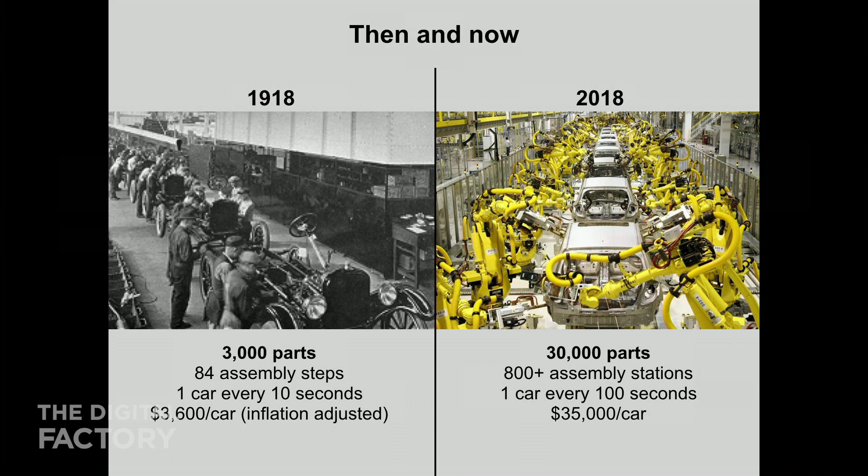So perhaps why we're all here is because we see the opportunity to become much more efficient, flexible, versatile, on demand, at the point of use, whatever words you use in your specific context.

If I may sit on the idea of the automobile as a manufactured artifact, an automobile and many other products are so complex and so important that there exist businesses for the purposes of taking them apart and analyzing them. This is a successful business in the Detroit area called Munro & Associates, well known in what they do, but their business is they do competitive teardown.

They buy one or a few of every car and they take them apart and they do the reverse analysis of how they were manufactured and what the costs are.

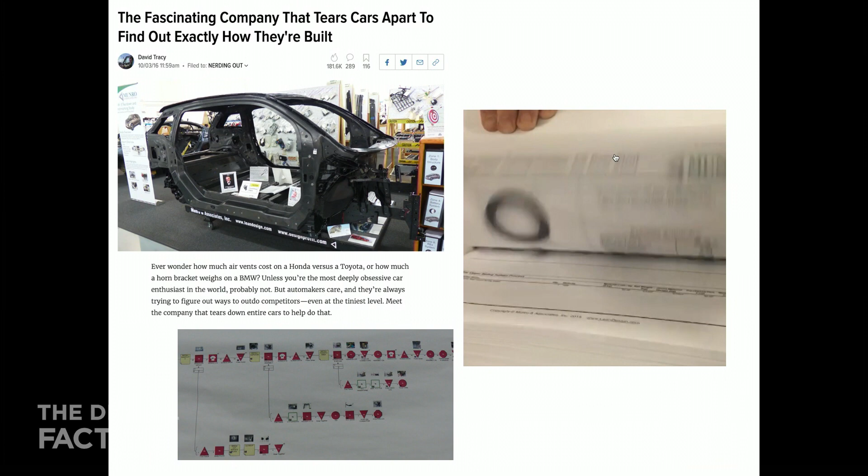Just think of the many levels of complexity that are created by having to use today's manufacturing techniques, which are so awesome in their own right, but so limited now that we can see the digital opportunity.

And of course, it's not just the resources required to manufacture the part and realize that capacity at scale, but it's the design and engineering and iteration process for the part and for the tool.

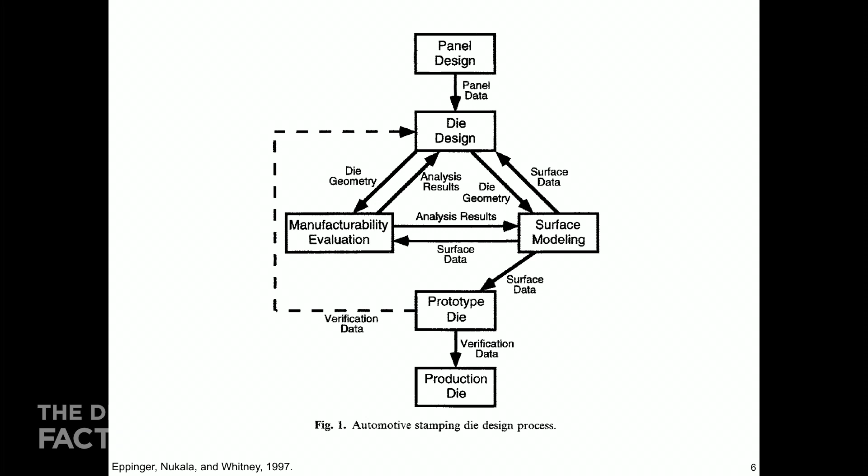I don't need to explain to you that if you're making a tool to make a part, say a sheet metal part, the tooling, design, and proofing requires iteration. So much opportunity for efficiency improvement.

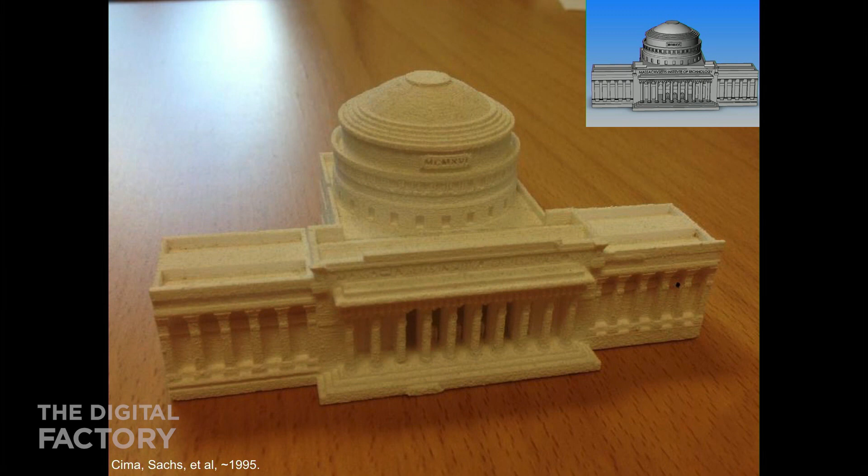And now we come to the idea of 3D printing, aka additive manufacturing, as an enabler of transformation. Of course, many of today's 3D printing technologies, in terms of the basic process, the basic idea, have been around for a long time. They were not invented yesterday.

I like being from MIT to show a picture of a 3D printed model of MIT's main building from nearly 25 years ago. My colleagues, Ely Sachs and their teams, were among the pioneers who had ideas to build objects digitally in 3D using the processes that are just coming to fruition today.

You can look at the additive manufacturing 3D printing industry in many ways, and you can say that it's about $10 billion, as reported by the Wohlers report recently, in materials and services and machines. But moreover, what's important is an industry with structure is emerging.

We have great interaction and collaboration among the software companies, the materials companies, the printer manufacturers, and the establishment of production capability, whether it is in-house in companies that want to vertically integrate or grow the capability in-house, or via service bureaus, whether you interact with them directly or virtually.

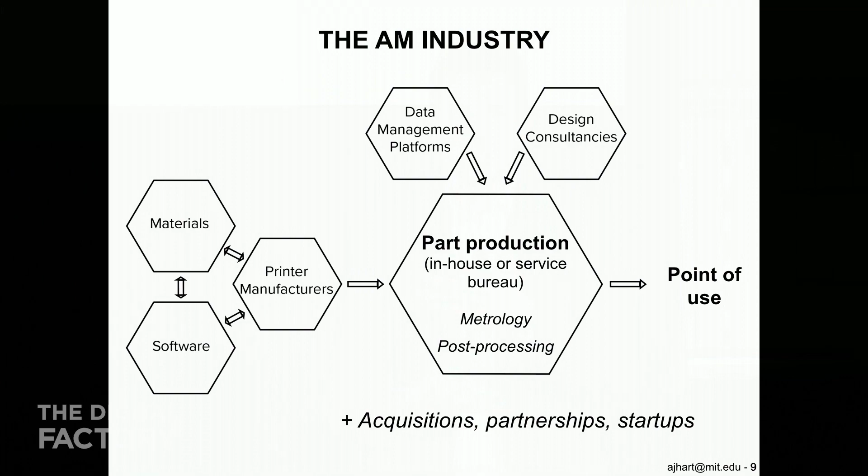We'll only see continued growth in all of these areas and interesting collaboration, partnership, and competition. That's the nature of that free market that's going to continue to grow the industry at an appreciable rate for the foreseeable future.

But moreover, I think it's not only important to say how much money the industry is generating every year, but what is the lens through which we should view the impact of additive manufacturing. In our courses at MIT and with industry, we've adopted the idea of viewing additive through the lens of the product life cycle. Every part that's designed, every product that is sold, arguably has a life cycle from the day of the first concept, the first idea, to the end of its life, when the last one on the road is serviced and used.

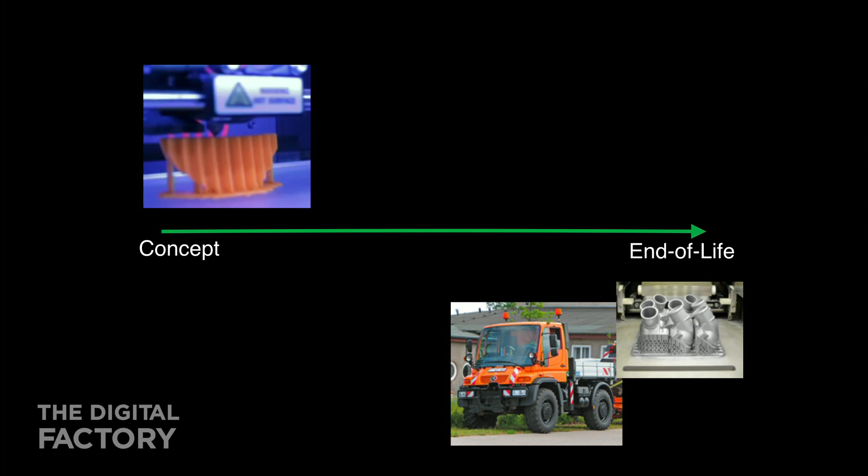But what's really exciting to all of us is the production applications. We cannot yet argue that additive manufacturing is a true mass production technique, at least not writ large, but there are more and more compelling applications where functional high-value parts are being produced using 3D printing at scale. This reflects, in my opinion, a far greater investment in technology adoption and integration than the measure of printers, materials, and services sold on a yearly basis.

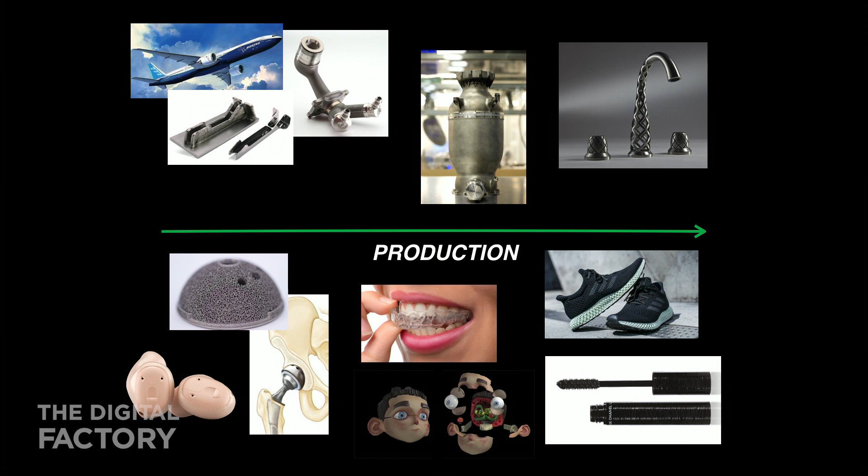So you have more and more valuable metal parts, from jet engine parts to components of rocket engines to even high-end home goods—you can buy an expensive faucet where the water goes up the spiral lattice. More and more medical products, metallic implants, where the real special deal is that the lattice structure on the surface of the implant improves patient outcomes and integration. That's the case of the hip implant, but it applies to many others.

Dental products, we heard about those earlier today. Even Chanel—you can go to a cosmetic store and buy a Chanel mascara with a 3D printed plastic brush designed to help distribute the mascara better on the eyelashes. So we're realizing the integration of these technologies in a true production context, and we're only at the early stages.

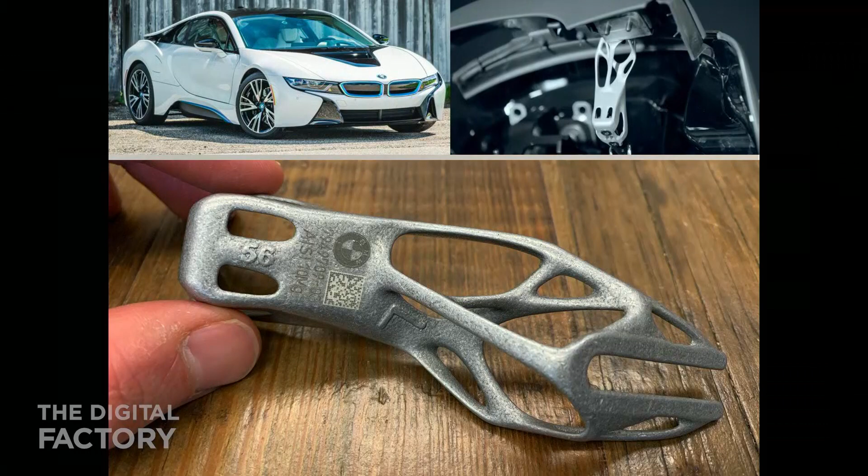One of my favorite examples, which maybe you've seen before, is this part from BMW. I have no affiliation with BMW, but I really think this is a beautiful example because it speaks, number one, to the fact that we're just scratching the surface of 3D printing's applications in the automotive industry. The automotive industry is vast, has huge scale demands and also very tight cost demands. So I think automotive will bring 3D printing to the mainstream like no other industry, in my opinion, but also that it's a story of design for 3D printing, achieving a very unique, complex shape, and also manufacturability.

If you study it a little bit or talk to them, you find it's maybe, you could say, a silly little part. I don't mean that negatively, but it's just a little roof bracket to open up the roof of a high-end roadster. It's not an engine part or a chassis part.

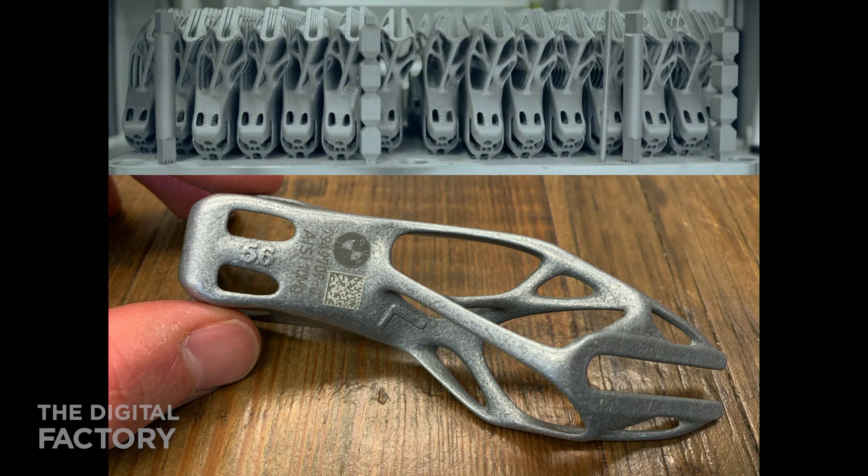But nevertheless, it has a serial number, so it is a real production part. And if you look at how it's manufactured, it's designed with manufacturing in mind. Because of the process they used, which has requirements for support structures and issues with thermal stress, they had to design it so it could be manufactured post-processing free. They make 300 or so on a build plate and snap them off. So it's a beautiful example of not just computationally guided design to make this beautiful shape, but also the incorporation of manufacturing constraints—this full spectrum knowledge necessary to realize a useful application.

But saying that you can make an exotic geometry by 3D printing and make a production case for tens of thousands of parts is only thinking of one of the vectors for value creation.

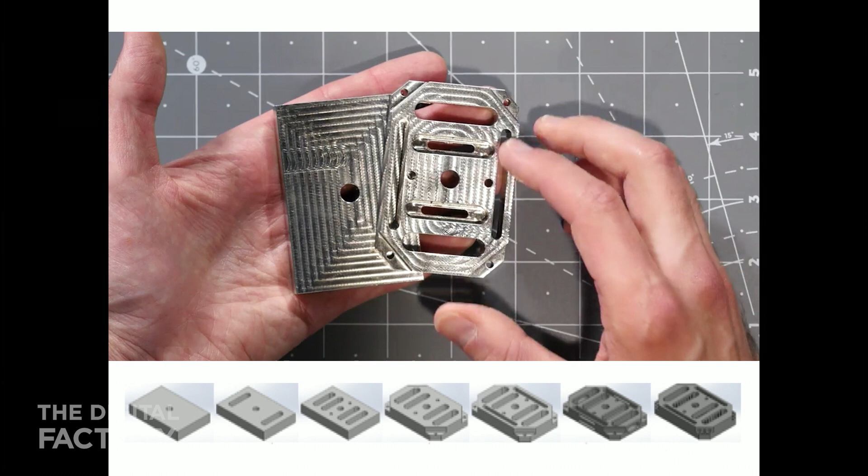Let me give you a very simple thought experiment. Consider a block of metal about the size of a deck of playing cards, or close enough to the size of your smartphone. Imagine creating different versions of that, all the same external size, but with greater complexity—more features from different orientations, all the way up to a part with a very complicated internal structure, something ideal for 3D printing because, say, it's lighter weight. Think of the cost of making that part versus its complexity if you manufacture it a conventional way, say machining, versus the cost of making it by 3D printing.

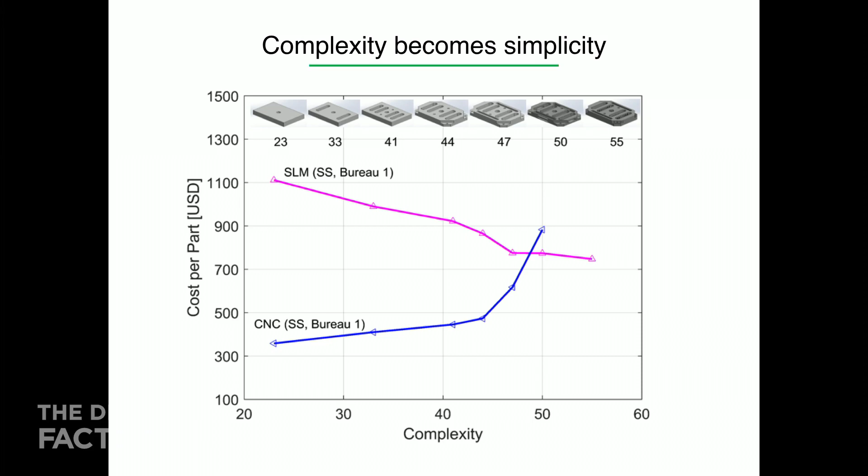Just look at the cost of an established laser-based metal 3D printing process. What you see, perhaps not surprising but really profound, is that the trend of cost versus complexity is completely the opposite. If I machine it, it costs more to make the part more complex because I have to use more machine time and take more material away—and I waste more material too. But if I 3D print it, the cost goes down with complexity because I use less material and less machine time. Here is just one example: with a very complex design, it's already competitive to make it by metal 3D printing versus machining. Think of how you can capture that trade-off in the applications of interest to you.

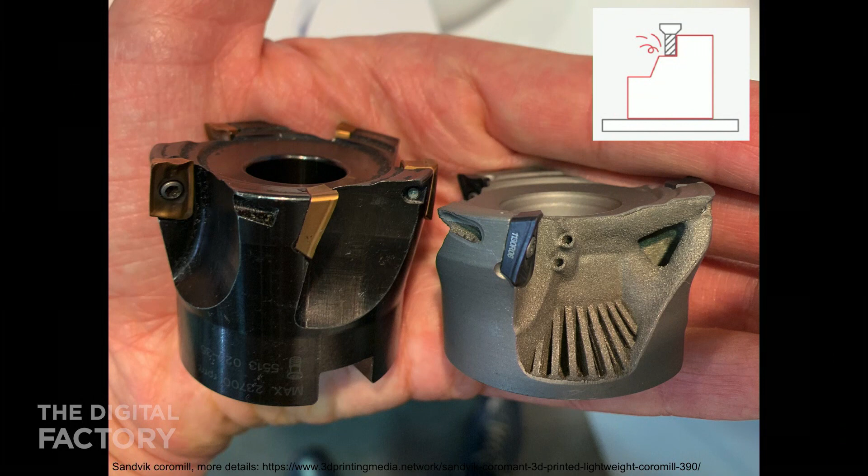Many other stories—here's tooling from Sandvik, a large tooling manufacturer. You can purchase this: a high-speed milling tool for use in conventional manufacturing, made by 3D printing. They put the hard insert on the 3D printed part. It's lighter, it can spin faster, and it has internal cooling channels. So this idea of reducing manufacturing cost by leveraging complexity isn't even thinking about value and performance yet.

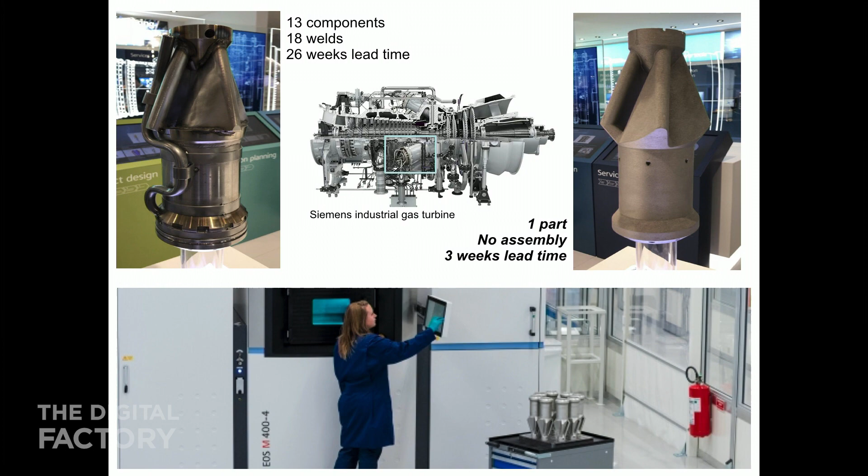More sophisticated examples exist in system-level design and part consolidation—you've likely heard many examples throughout the day. This one from Siemens I particularly like, because they clearly describe how they redesigned a burner for their industrial gas turbine. Siemens isn't in the business of 3D printing to make printers or printed parts, but uses 3D printing as a design vector to increase the performance of industrial equipment. They redesigned this burner for higher performance in the combustion process, but also reduced the number of parts significantly, reduced assembly steps, and reduced lead time. Organizationally they're probably still in transition on how they run a project like this, but from a performance point of view, think not only of how the part brings value, but—going back to the idea of manufacturing being so inefficient—how you can consolidate operations and capture value there.

We've heard a lot today about the digital thread, the digital factory, etc. I think we might all agree that software will spin the digital thread, but I also feel that the machines are the cornerstones of what we will establish as the future digital factory. I'm fortunate to be a member of the founding team of Desktop Metal, which you heard about this morning from Ric, and I think the Desktop Metal production system is a great example of the machines that will be the cornerstones of the future digital factory. Now, if you ask me whether Desktop Metal's process will win over all others, I'll say it's too early to tell, and that each 3D printing process will survive in its own right.

There are many important principles that the team here and in other advanced 3D printing companies are working on that allow us to realize fundamental principles of scalability. This one being the use of inkjet printing to bind powder together and let you build parts quickly. And that's just a short video clip of one of the production-ready machines operating in their lab in Burlington.

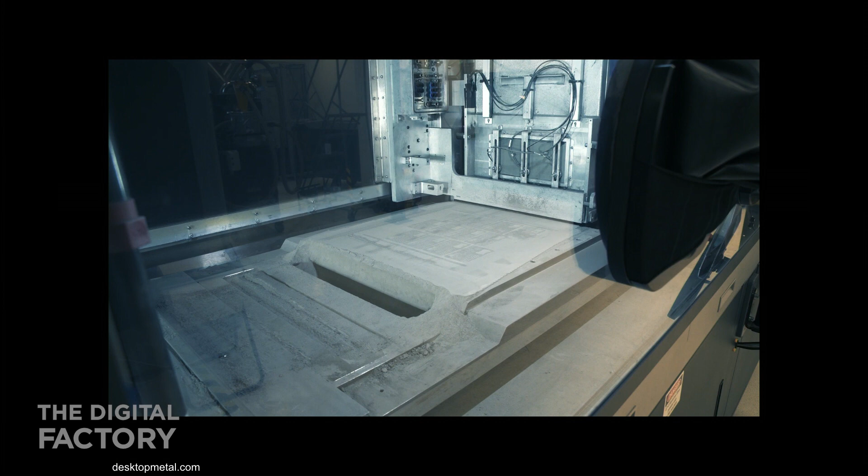I understand some of you are going to get to visit there tomorrow.

The other point I'll make is it's not just the printer, but it's the supporting hardware. The printer itself is fast and can produce good quality components, but it's about thinking of how you design the whole system around the printer to create a production workflow. This is a case where companies developing these technologies need to work very intimately with customers to figure out, in specific contexts, what is the best way the whole system needs to operate. I won't dive into the details, but suffice to say it's not just the printer, it's the supporting hardware, it's the handling of material, and so on.

It's really exciting to me, with great credit to the team at Desktop Metal and all the small and large problems they're solving and inventions they're creating, that they're thinking at the system level beyond just the printer. I think that's really, really critical. Parts coming out of the machine start small but have fine detailed features, and make a whole variety of geometries in large quantities in a short amount of time.

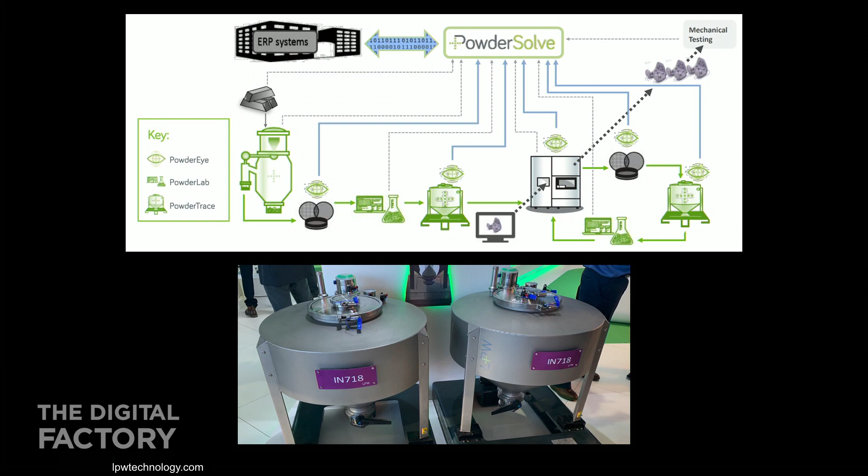Another exciting thing is technology to trace materials across the workflow, creating a digital thread of data from materials. Here's an example from LPW, a company in the UK that has technology to create data from tracing metal powders through 3D printing processes. For each process and material, the exposure of the powder to moisture, its mixing, its reuse, etc., is critical to establish quality control. It's great to see technologies like this reach the marketplace—it's another part of the digital thread.

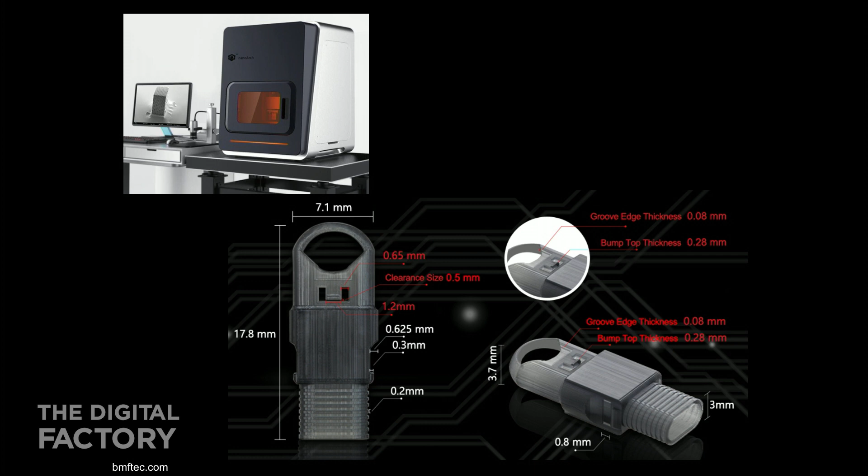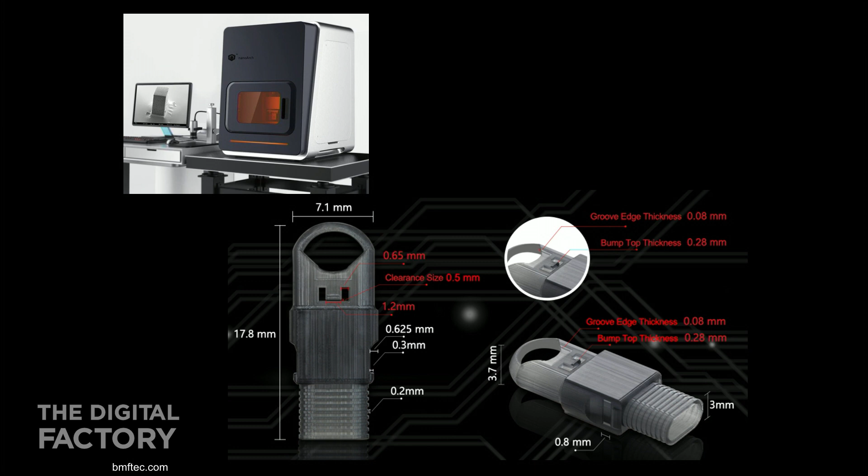Another thing that excites me is machines that focus on particular corners of the manufacturing market that are of their own high value. One company, BMF, is a startup from one of my colleagues' research at MIT, focusing on stereolithography with projectors. Same general concept, but their focus is on high precision small parts, which they can make more precisely and more cost effectively in some ways than micro-scale injection molding. It's not just about plastic parts overall, but focusing on the micro-injection molding market and thinking about how 3D printing could compete in design, speed, and flexibility. It's great to see these benchmark AM technologies now being applied to specific corners of the manufacturing market—that's an indication of the industry reaching maturity.

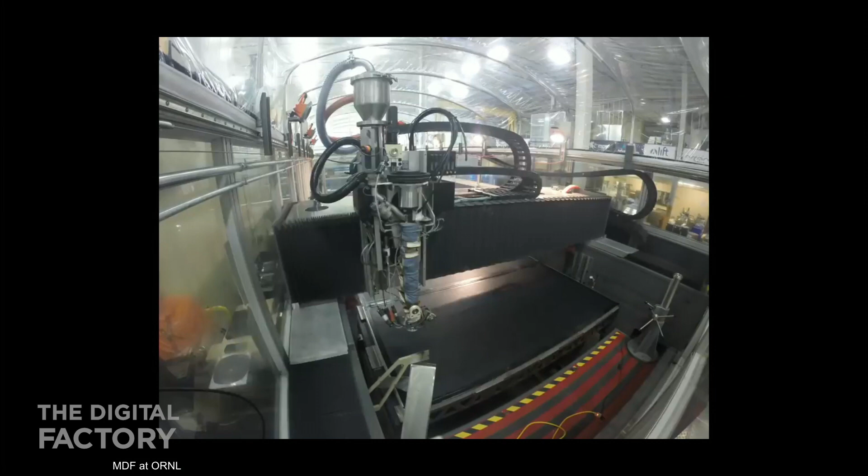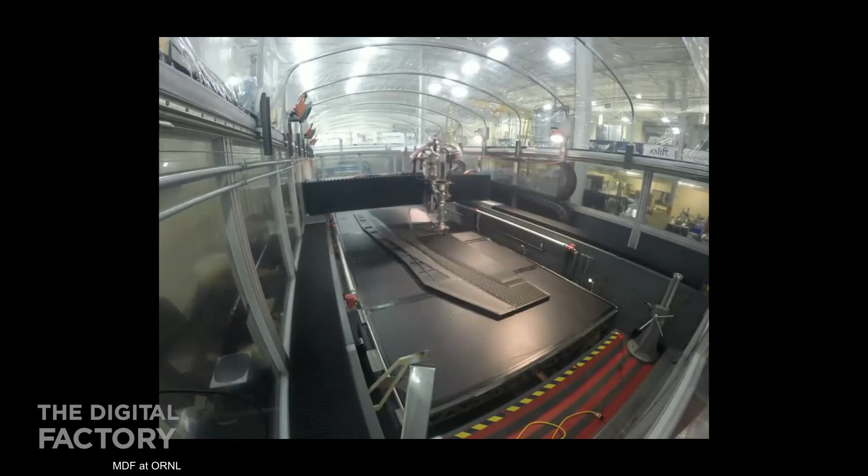I'm also a big fan of large-scale 3D printing—not only large numbers of parts in factory-style layouts, but also big parts. You may have seen the large-scale 3D printing work underway for many years at Oak Ridge National Lab, commercialized through several partners. This is a big extrusion printer, the size of about half of this hall, and over a period of days it's printing a tool for layup of a composite component for an aircraft. When I first saw this, I thought it was just a little experiment, but you really see the cost and time savings and design flexibility it brings.

So we can think of 3D printing not just to print parts, but also to print tools for manufacturing, and not just small components, but large ones too. One example is a multi-piece layup tool for a composite wind turbine blade. There are advantages to having a 3D printed tool for a composite wind turbine blade, in addition to being able to create the tool more quickly.

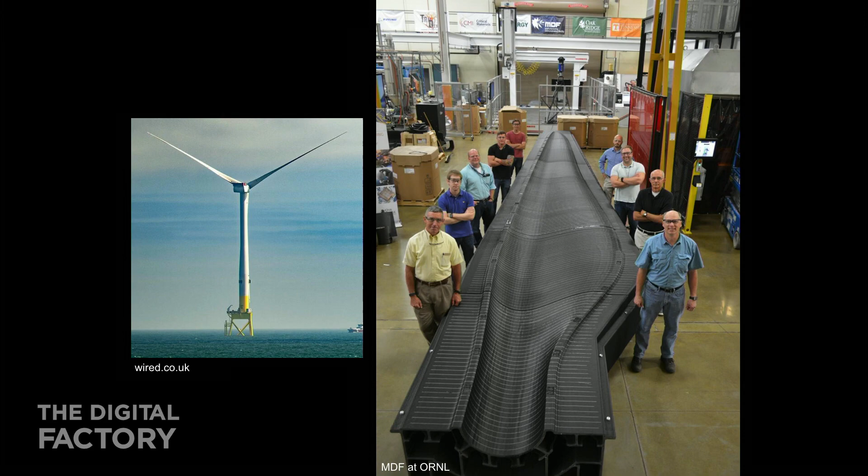It can be used to repair traditional mold tools, and you can bring the printer to the tool rather than bringing the part to the printer. So there will be perhaps unexpected uses of these different technologies when they're adapted to specific contexts, and I think many of the small and large uses are probably beyond our imagination.

To summarize the examples I showed, I think it's exciting that the industry overall is not just thinking about speed in making machines faster, but thinking truly about how to establish productivity, end-to-end productivity. We also have an increasing variety of hardware that can operate from small to large scale. We've seen the impact of Formlabs and other companies making productive, reliable desktop printers on not only prototyping and small-scale manufacturing, but also being the accessible tool so you can go to an industrial scale when you're ready.

I think there's a very important connection between the evolution of these technologies and the market and application focus, whether it be a specific printer or printing system designed to a particular industrial market, or the coevolution of the application stories, the really valuable uses that then feeds back on the technology development. And I think the end game is indeed the digital thread or the digital tapestry from design to finished part. But in many ways, it is the hardware, the machines, that will be necessary to enable the digital thread and create the consistency and data-driven reproducibility and productivity that the industry needs.

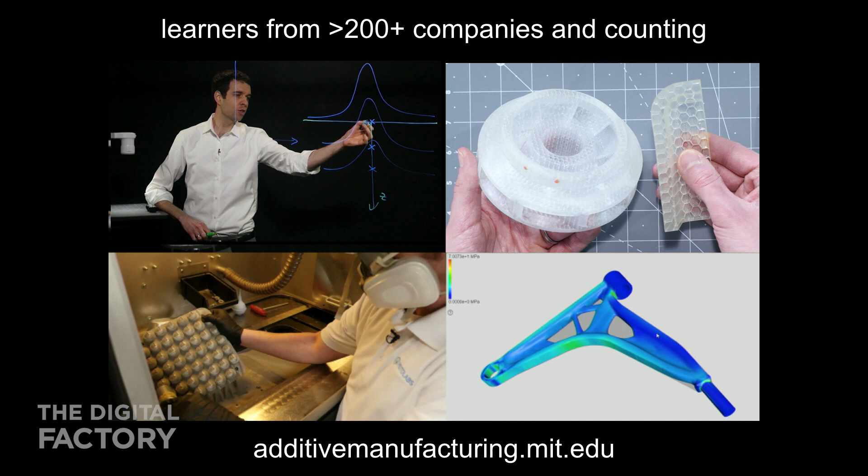This is largely in the form of an online course that we launched about a year ago and has now been taken by thousands of professionals, from at least 200 different companies around the world. This is a course that combines video of myself and colleagues lecturing, interviews with experts, as well as examples shown in high detail with real stories of the business case and the performance benefit, to try to really, the best that you can in a digital environment, teach you the ups and downs of additive and its integration in the product lifecycle as a whole.

And for me, it's been one of the most useful experiences in learning about where a technology really can go and what the barriers are, and it's had a great feedback to my research and the other things that I do.

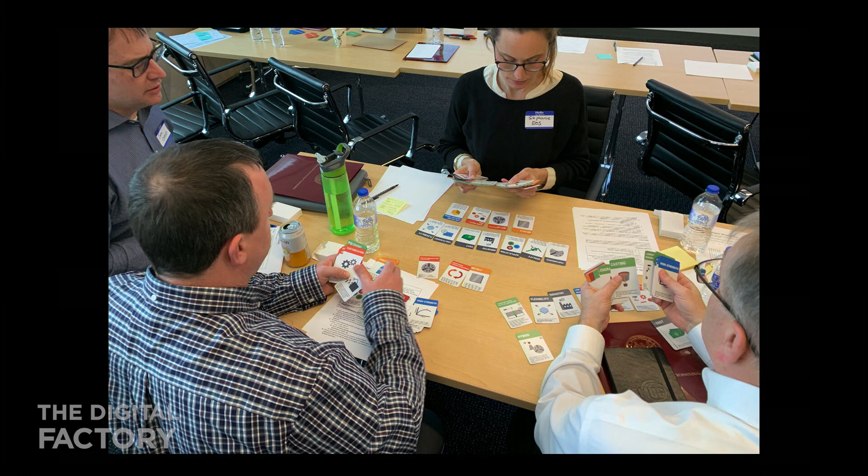And we've also begun to have in-person workshops, and we've developed a few tools that seek to accelerate the sort of free-form conversation you would have when you're exploring, say, 3D printing for a new application. One of those tools is a little card game. We have a deck of cards that basically graphically, with simple text, lays out different process constraints and choices and design variables like light weighting and customization and so on.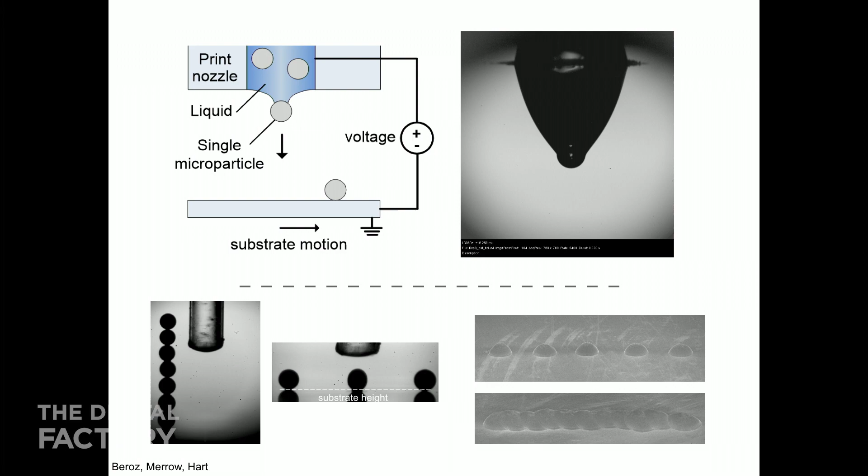and then you can do things like melt them so they form these half dome-shaped droplets or lines of metal. Far from a commercial process, but a new technology that we hope might have a space in the inaccessible zone of some of today's 3D printing processes.

Another effort actually sponsored by a large consumer products company that went in an unexpected direction is thinking about manufacturing using cellulose-based materials. So cellulose is the world's most abundant natural polymer, and we ended up developing a kind of 3D printing process that takes nanocrystals of cellulose.

Basically, you take trees and beat them up until you have their smallest molecular unit at the nanocrystal size, and you can create an ink for 3D printing, and you can then cure that ink into a cross-linked material that ends up having fairly high hardness and fairly high toughness. So properties that begin to infringe upon the realm of metals. They're not metals, but they're not polymers, and they're somewhere in between.

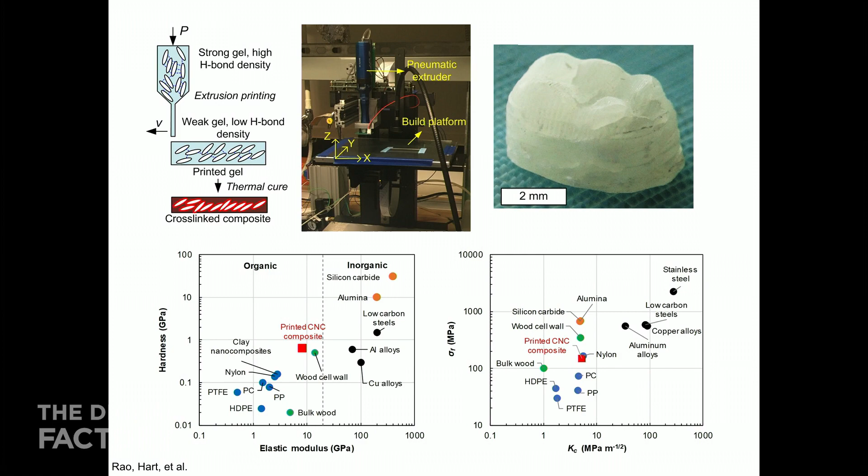So we have some really interesting results by designing a new material for 3D printing based on a natural polymer that in a way show one specific example of the opportunity to design even new materials for 3D printing that complement what's already out there. And then we're also motivated by maybe the under-the-radar problems that are really important to get the current and next generation of 3D printers to work better.

So our group at MIT, in combination with a really awesome group of computational scientists in Germany, have developed a tool set for modeling the flow of powders. Right? The spreading of powder, metal or plastic, different sizes, different materials, is really important to getting a consistent 3D printing outcome, though maybe it's just one little thing you think of.

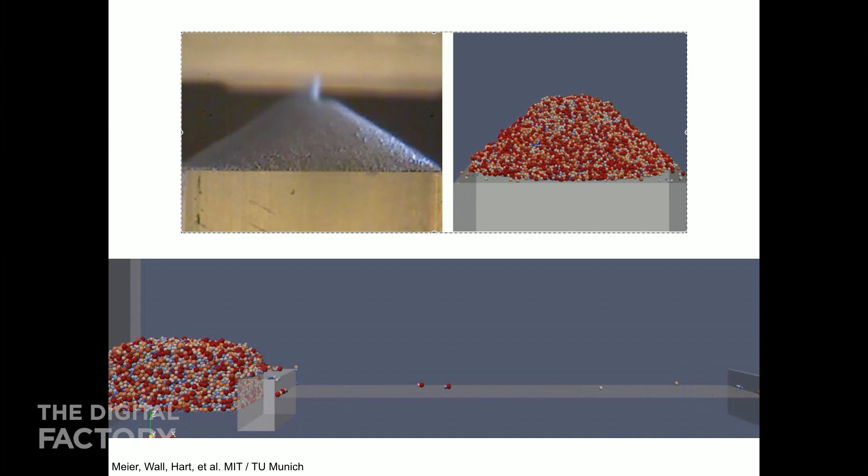And we've developed a tool set based on a very sophisticated computational toolbox from the group in Germany to be able to basically, in the computer, model the spreading and other attributes of metal powders and look at key things like the effect of the adhesion between the particles, which becomes very important as you get to smaller particle sizes and expose the powders to different environments, and then simulate the spreading process, for instance.

And the idea here is you can then take one of these simulated layers, and you could then simulate the 3D printing, the fusion of the metal, or you could simply look at this layer of powder in the computer, and you could spread a layer of powder in your machine, and you could determine to what extent they agree, and you could, say, correlate defects you measure from your printer to defects in the simulated powder layer, and try to develop in the long run better, you could say, computationally driven quality statistics.

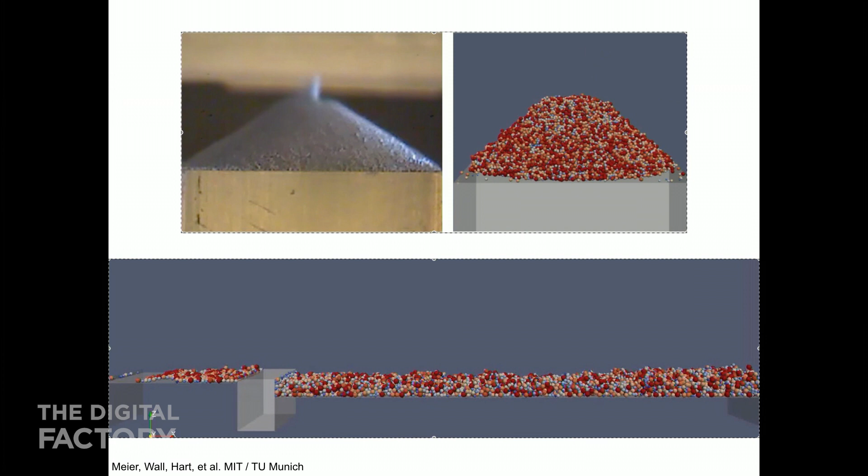That's a mouthful, we're not even there, but you can see the potential of these advanced computational tools to advance all aspects of the process, and the fact that every little detail is important to get it right.

It is a mix of the kinds of research that I showed you, the educational programs that I described, plus forming a community of members who come to MIT and have workshops with us and help to identify the trajectory of the digital technology and define problems that require shared solutions.

So I'll wrap up in just a moment and say the following. If I look at all of the kinds of examples that are shared today, I bring myself back to this chart, which says the following. Right? I may define manufacturing now as creating value at scale, where scale is large numbers due to the fixed investment we have to make. But in the present and future state, we really are all thinking about manufacturing becoming more adaptive.

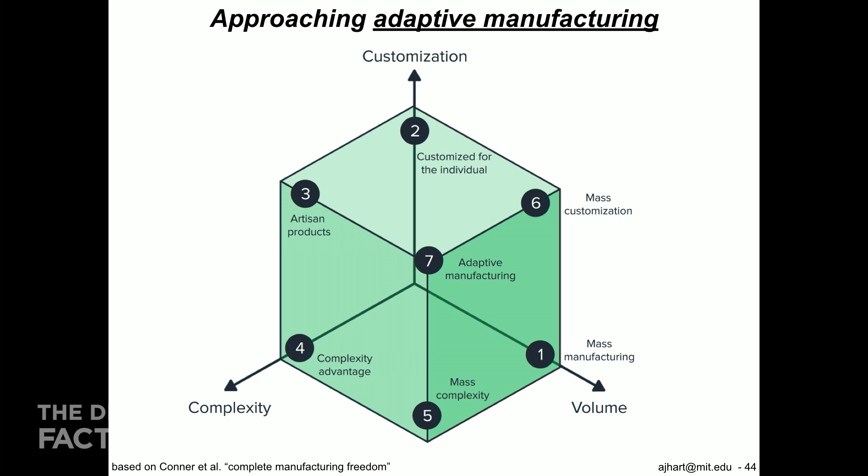And imagine that with digitization, we can create products all throughout this virtual three-dimensional space. We can still make stuff in huge quantities that is valuable, but we can also customize individually, we can mass customize, and we can take complexity from being a challenging thing to being an enabling opportunity for value creation and also a simplicity of consolidation.

And when we think about how fast is the technology going to grow and how big will the market be next year, we can make useful predictions. But moreover, to me, one of the most exciting open questions is, what are the scaling laws? You think of in the semiconductor industry, Moore's law saying for decades that the number of transistors on a chip would double every 2 years. And that held for a very, very long time, right?

I wonder, is there an analogous law that governs digital manufacturing? Or moreover, how do we create actionable models that let us prescribe and quantify value when it comes to these types of transformations? Like looking, simply, but this requires a lot of detail, at an engineering process and saying it's not just the final component, but it's valuing the consolidation of engineering effort to simplify the design, perhaps increase performance, and also grow operational flexibility downstream.

And what's really exciting when we talk to many of our industry partners is not just that there's great interest in learning and investing and buying printers and partnering with materials companies and all that jazz, but more and more organizations are starting to think far enough in the future, allowing themselves to wipe a clean slate, to say not this product generation or even the next one, but maybe the one after that. How do we need to restructure a part of our engineering team and invest in the capacity so we are ready when the technology is ready?